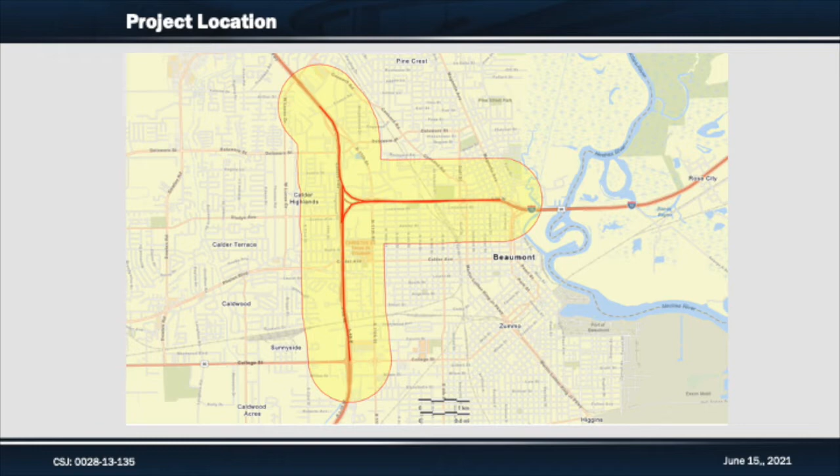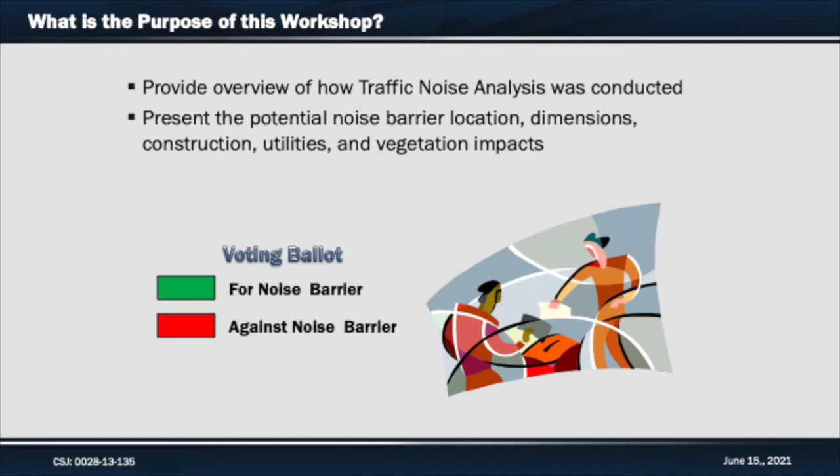What is our goal for today? First, to provide you with a general overview of our traffic noise analysis and criteria used to develop our preliminary noise barrier recommendation. Next, to explain your role in making your voice be heard. After learning about the proposed noise barrier, you'll be invited to cast a vote for or against the noise barrier. Details regarding the aesthetic and landscape design elements as they pertain to the noise barrier are part of this presentation. We want to provide you with all the details necessary to make an informed decision in order to vote for or against the proposed noise barrier.

I will start out with some general information regarding sound and noise. Then I will describe how the traffic noise analysis and abatement process was conducted for this project. Then I'll describe the proposed noise barriers. The purpose of the project is to alleviate congestion, to provide a more reliable transportation and evacuation route, to enhance connectivity and mobility, and to address safety. The two I-10 interchanges with US 69 in Beaumont are a critical part of the strategic freight network and hurricane evacuation capacity in southeast Texas. Tonight's presentation will focus only on the Eastex interchange.

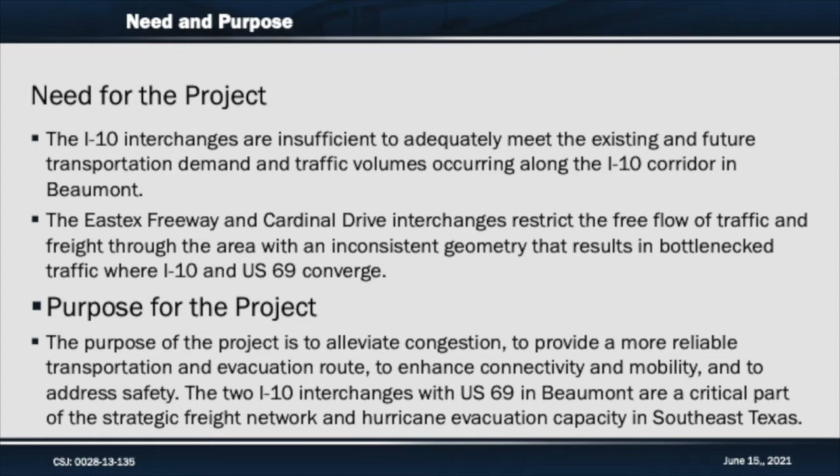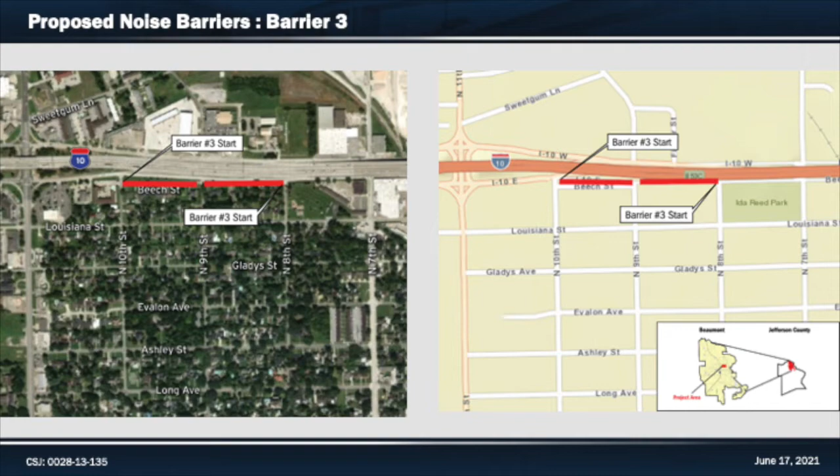This slide shows where the proposed noise barrier 3 would be located. Barrier 3 will be constructed in two segments between 8th Street to 10th Street and allow for through traffic at 9th Street. Let us discuss some general information regarding sound and noise. Then I will describe how the traffic noise analysis and abatement process was conducted for the project. We will also talk about the proposed noise barriers. The project team will be available at 6 p.m. on June 17th in a live noise barrier workshop to answer any questions that you may have.

What is sound? Sounds are vibrations traveling through the air as sound waves. Noise, on the other hand, is unwanted sound. Cars and trucks generate noise. This traffic noise is produced by the movement of engines, the vibration of exhaust systems, and the friction of tires against the roadway. The loudness of noise from traffic depends on the road surface type, the amount of traffic, how fast the traffic is moving, and the number and type of vehicles traveling on the road. For example, 18-wheeler trucks with their bigger engines and many tires produce more sound than the typical 4-door passenger car. In general, the more traffic on the road and the faster the traffic is moving, the louder it will be for a person near the road.

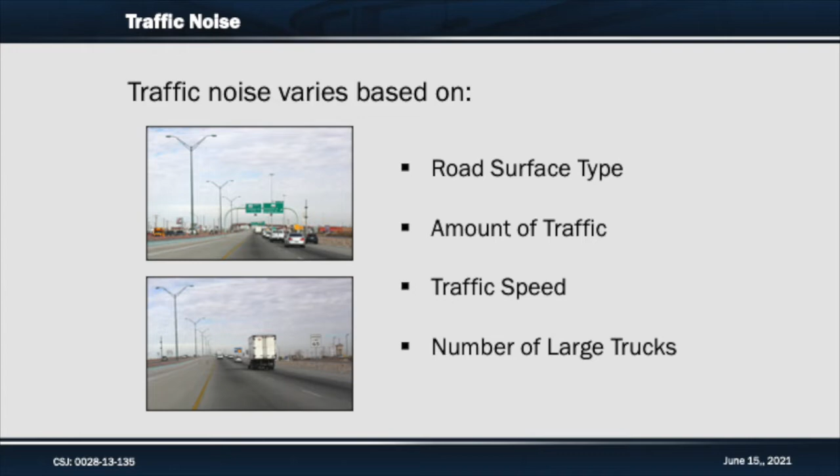Additionally, if you are within the line of sight of a highway, it is going to be louder than if you cannot directly see the road because sound is loudest when it travels in a straight path. Sound waves move outward from a source in all directions. When there are no objects in between the source and your ear, noise will travel in a direct path. However, sound can be reduced by placing a solid object or barrier, such as a wall, in between the source and the receiver. The location and height of a barrier can affect the amount of noise that is reduced.

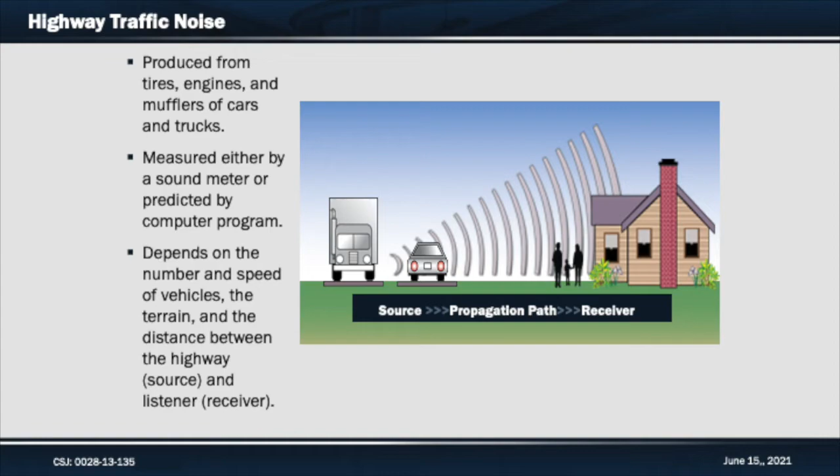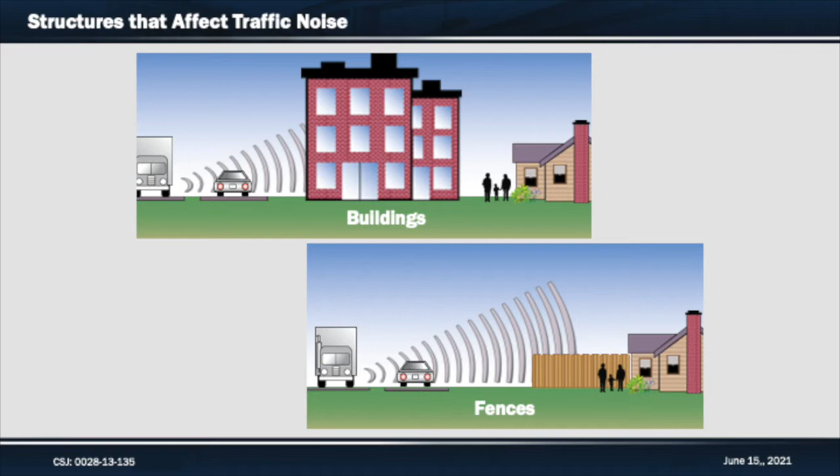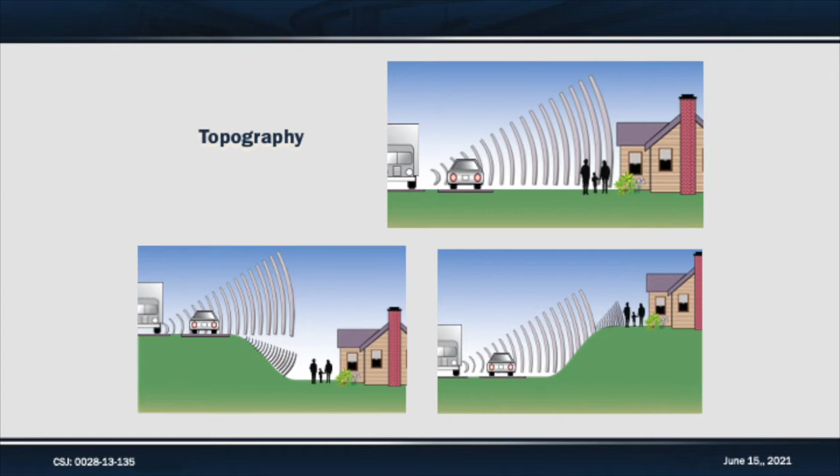Highway traffic noise is often blocked by buildings. Tall fences can reduce sound levels, but no barrier can completely block all traffic noise. Topography also affects highway traffic noise levels. When the highway is either higher or lower than the receiver, overall noise levels are reduced. In both these cases, the sound waves have a longer path to travel. So how does TxDOT evaluate traffic noise and noise abatement for highway projects?

The Federal Highway Administration, or FHWA, requires that we conduct noise studies when federal funds are utilized and when adding capacity on existing highways which may have an increased effect on noise. The purpose of our noise study is to investigate the impact that the I-10 US 69 Interchanges project has on the nearby outdoor areas frequently used by people.

The noise analysis for this project was performed in accordance with TxDOT's Guidelines for Analysis and Abatement of Roadway Traffic Noise and Reasonable Cost Allowance for 2018 Noise Policy. The TxDOT guidelines have been approved by the FHWA. The Federal Highway Traffic Noise Modeling software, known as Traffic Noise Model or TNM, was used to calculate the existing and predicted future traffic noise levels along the roadway project.

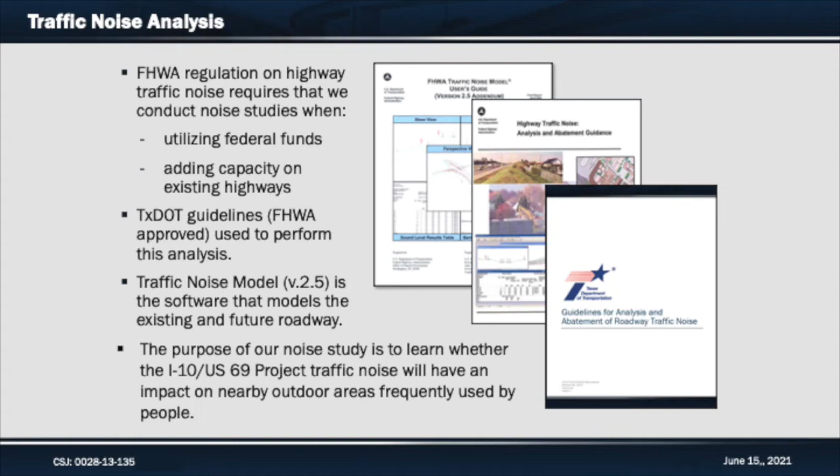A traffic noise analysis is a multi-step process. A noise workshop is usually one of the last steps in this process before the final engineering plans are approved and the project is constructed. The noise analysis process includes identifying noise receivers, modeling noise levels, identifying potential noise impacts, considering abatement for noise impacts, and finally, talking to the benefited residents and owners adjacent to the road about the results of the noise analysis and soliciting the vote of property owners at a noise workshop.

The purpose of a noise analysis is to determine whether traffic sounds from a highway will have an impact on nearby outdoor areas frequently used by people. These areas are called receiver locations or receivers. Some examples of receivers include residential backyards, playgrounds, and schools. After identifying receivers, a noise analyst determines existing and future noise levels at these locations. Then, based on the predicted noise levels and criteria, the noise analyst identifies possible noise impacts and looks at ways to reduce those impacts.

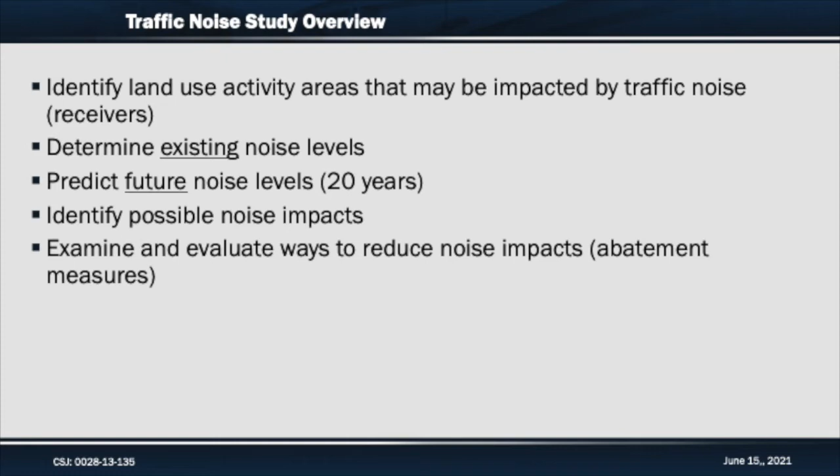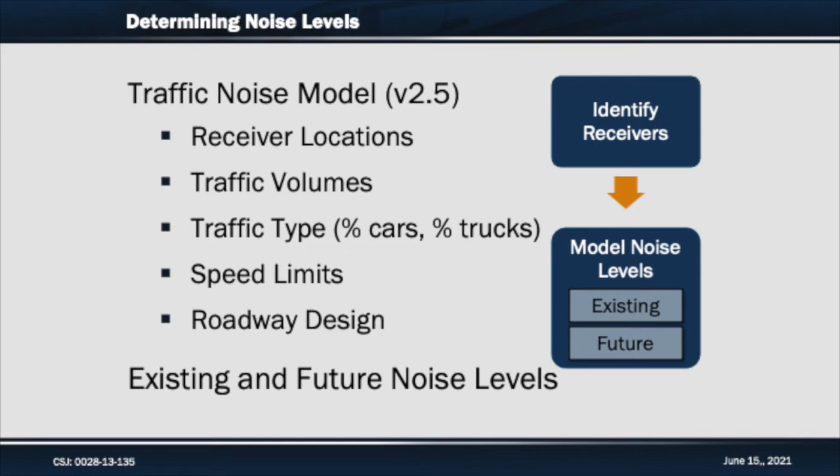The traffic noise analysis is performed by using an approved computer modeling software called Traffic Noise Model version 2.5. The computer model requires the analyst to enter noise receiver locations, the amount of traffic, and traffic type. Traffic type is a percentage of cars, medium trucks, and heavy trucks. The model also considers how fast the traffic is moving, the roadway design, and surrounding terrain features. Traffic noise is modeled for both the existing traffic and roadway conditions and for future traffic projections and the proposed highway design.

So how do we determine if there will be a traffic noise impact? We use noise abatement criteria established by the Federal Highway Administration. The noise abatement criteria, or NAC, for residential land use is 67 decibels. A decibel is a measure of the loudness of sound. There are two types of noise impacts. An absolute impact is when the predicted noise level at a receiver approaches, equals, or exceeds the noise abatement criteria value. For residential properties, an impact would occur if the predicted noise level is 66 decibels or more. A relative noise impact is when the predicted noise level is substantially higher. This is when the future noise level is more than 10 decibels higher than the existing noise levels.

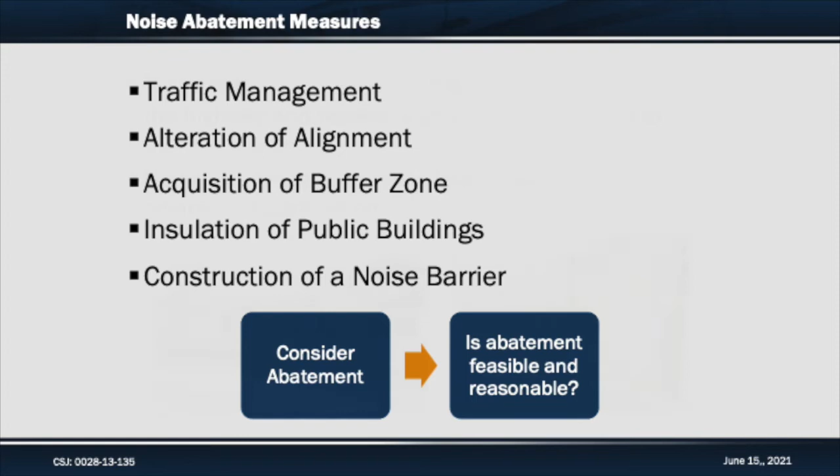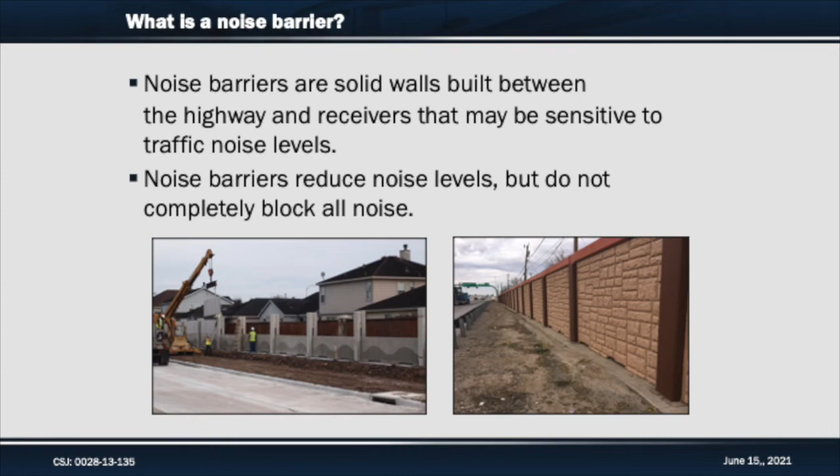If there is a noise impact identified, then the next step is to consider abatement measures. Abatement measures are actions that could lower the noise level. These include traffic management, alteration of alignment, acquisition of buffer zones, insulation of public buildings, and finally, the construction of noise barriers. Construction of noise barriers has been determined to be the best solution for this project. What is a noise barrier? Noise barriers are solid walls or barriers that are constructed between the highway and people in order to help reduce roadway noise levels. Noise barriers can reduce noise levels but do not completely block all noise. However, a noise barrier cannot be proposed unless the barrier is determined to be both feasible and reasonable.

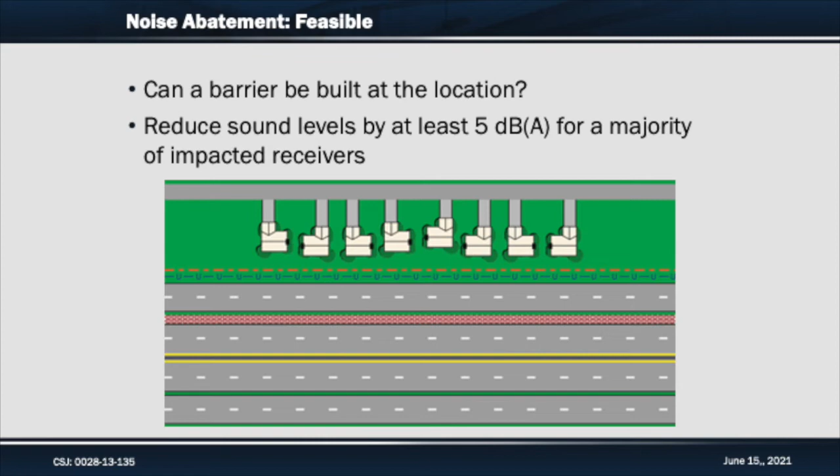What makes an abatement measure feasible? Feasibility first means that a noise barrier can actually be built in a location, given site constraints such as topography, driveway access, drainage, utilities, and maintenance. Feasibility also means that the noise barrier must provide a substantial reduction in noise levels. A substantial reduction is defined as a reduction of at least 5 decibels at greater than 50% of the first row impacted receivers. The second criteria is that a noise abatement measure should be reasonable. There are two measures of reasonableness. First, the baseline cost of a barrier is $25,000 per benefited receiver. Second, a proposed barrier has to meet a noise reduction design goal to provide a 7 decibel decrease for at least one impacted receiver.

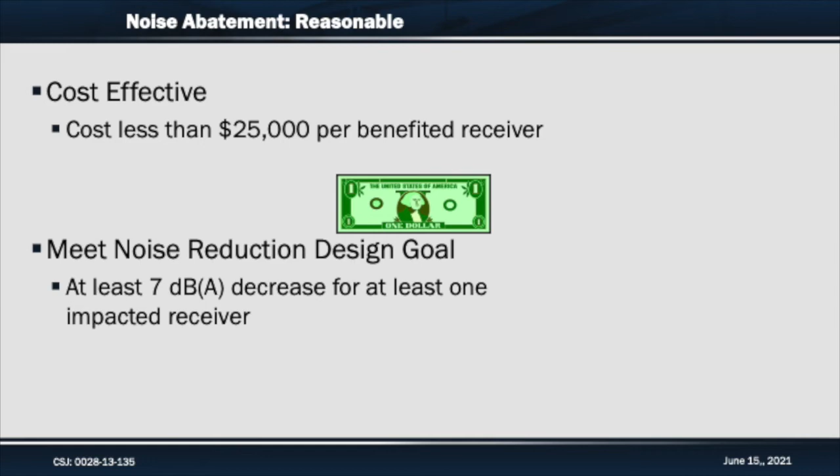For this project, noise levels would approach, equal, or exceed the level at which the Federal Highway Administration would consider noise abatement. As a result, noise barriers were evaluated at the I-10 and US 69 intersection. It was determined that the construction of noise barriers in 4 locations along I-10 and US 69 could provide feasible and reasonable traffic noise abatement for this project.

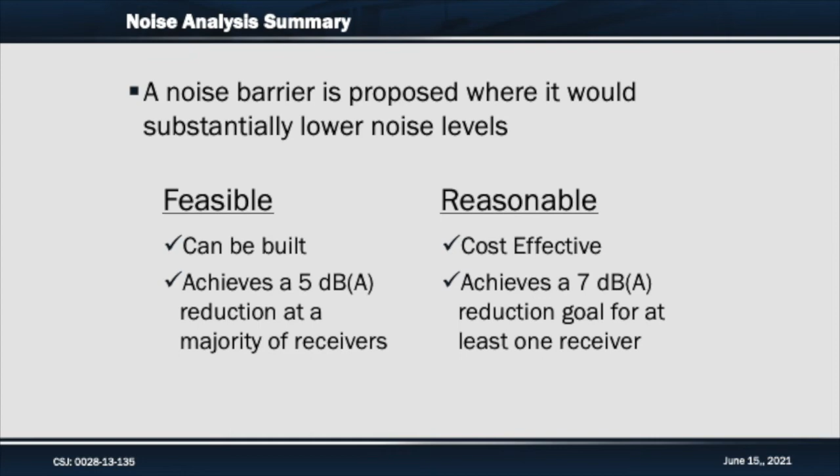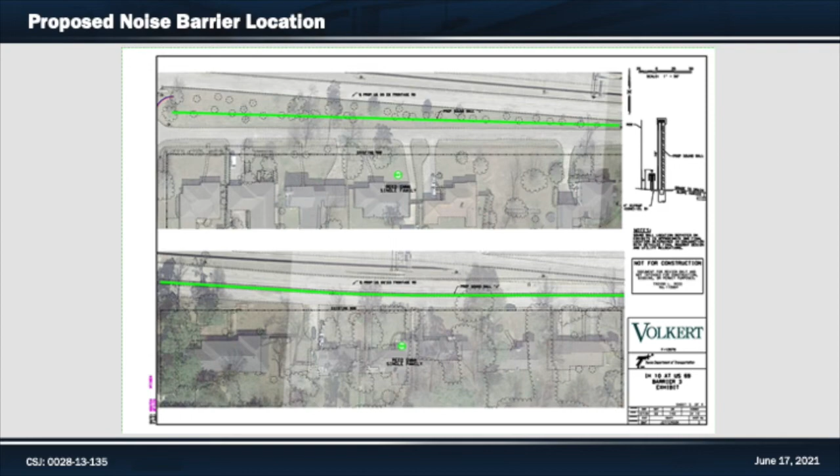In this presentation, we're discussing Barrier 3 along I-10. This slide shows a preliminary layout of Barrier 3. Barrier 3 would be in 2 segments. The entire barrier, including both segments, will be 1,311 feet in length and 18 feet tall. It would be located on the I-10 frontage road from 8th Street to 10th Street.

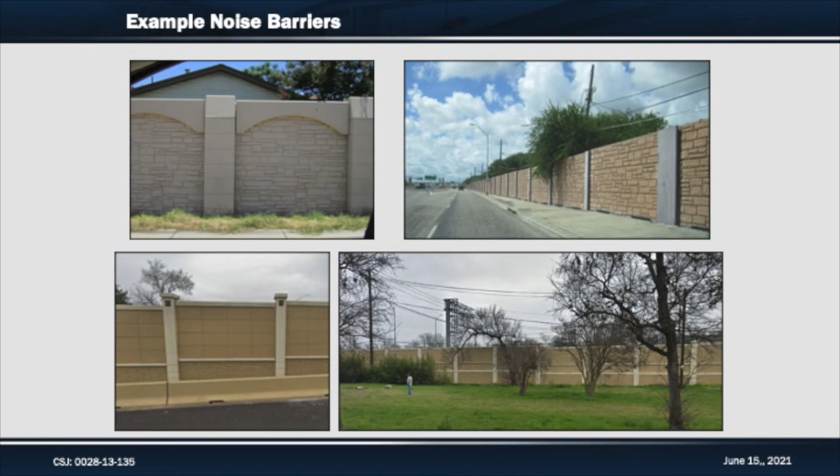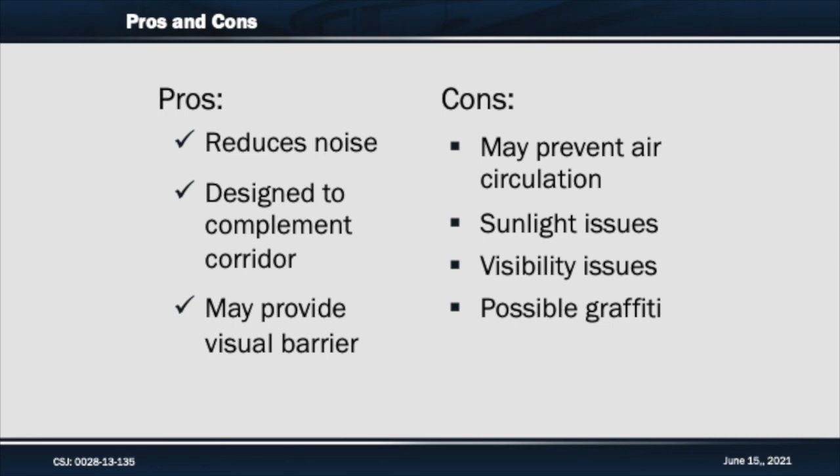Noise barriers are intended to provide positive aspects to neighborhoods, but there are some negative impacts that can occur as well. Noise barriers are designed to reduce the traffic noise and are normally well received. However, they can also result in restricted views, feelings of confinement, can affect sunlight, and in some instances limit access to nearby streets. Noise barriers may also provide a surface for graffiti. Finally, it's important that you know that a noise barrier will not eliminate all noise. There will still be noise, but it would be decreased.

So, who can vote? To be eligible to vote, you must be the owner or resident of a property that touches a right-of-way line near where a barrier is proposed. Only 1 vote is allowed per property. Some residents that are not directly adjacent to the right-of-way line have also been identified by the noise model. Those persons can also vote.

Not all votes are counted equally. A weighting system is applied based on owner occupancy. For owner-occupied dwelling units, the property owner's response counts as the 1 vote. If multiple ballots are received from multiple owners of the same unit, for instance, a husband and wife each submit a ballot, they are collectively counted as 1 vote. For non-owner-occupied dwelling units, a response from the resident or renter counts as 10% of the vote, and a response from the owner counts as 90% of the unit's vote. You may only vote for or against the proposed barrier nearest your property.

The decision to construct a particular barrier is based on a simple majority vote. For example, if there are 30 property owners eligible to vote, then a majority is 16 votes. So, if 16 or more owners vote in favor of the barrier, then the noise barrier will be built for that location. A majority of votes against the barrier would mean that a barrier would not be built at that location. It is important to note that the decision will be based on a majority of votes received.